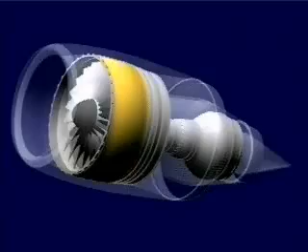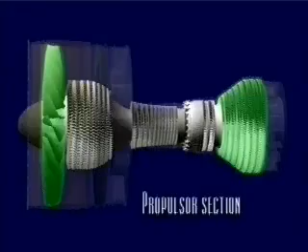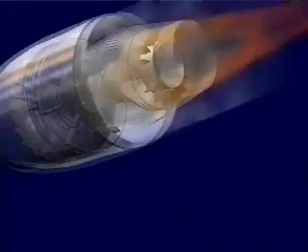The turbofan engine is a complex synchronization of several components working together as two parts: a core section that produces power to drive the propulsor section that produces thrust. Thrust is a force created by the acceleration of air, an application of Newton's second law of motion, commonly expressed as force equals mass times acceleration. It is this force that propels the aircraft.

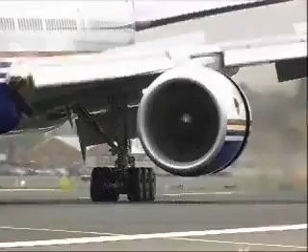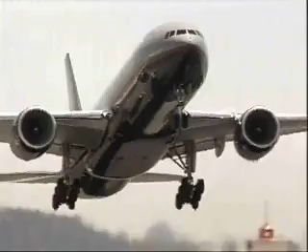To see how this thrust is developed, let's look at the internal workings of Pratt & Whitney's PW4000-112 turbofan engine. The first component is the huge 9-foot diameter fan that rotates 2,800 times a minute at takeoff. This giant fan sucks in enough air to vacuum out the air in a 4-bedroom house in less than half a second. As the air races through the massive fan, it's separated into two streams.

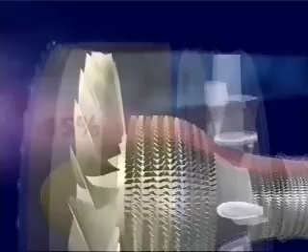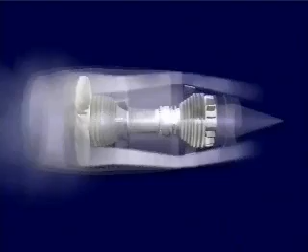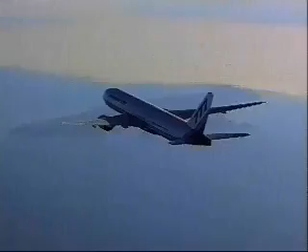Only 15% of the air flows into the interior core of the engine. The remaining 85% is ducted along the outside of the core and is forced through an ever-narrowing space, the fan duct, picking up speed along the way. The ratio of this air bypassing the core to the air passing through the core is called the bypass ratio. Because of its huge volume, the bypassed air only needs to accelerate a small amount in order to develop an enormous amount of thrust.

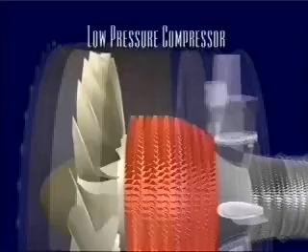Meanwhile, the other 15% of the air has entered the first component in the engine's core, the low-pressure compressor. Here, the air passes through several smaller stages, each consisting of a set of rotating blades in between a set of stationary blades. Each stage compresses the air, forcing its temperature and pressure to rise.

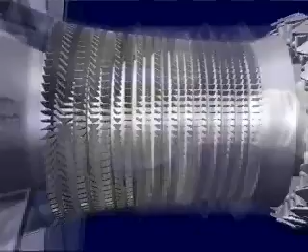After passing through the low-pressure compressor, the air enters the high-pressure compressor, which rotates faster and is responsible for 70% of the total pressure rise. After the air has passed through both compressors, it is 35 times higher in pressure and 1,000 degrees hotter than the outside air.

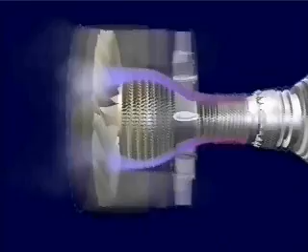The compressed air is now at the right pressure, but it is moving too fast to be efficiently ignited, so it enters a diffuser, where it slows down while remaining at the optimum temperature and pressure. The air then enters the combustor, where its energy level is greatly increased.

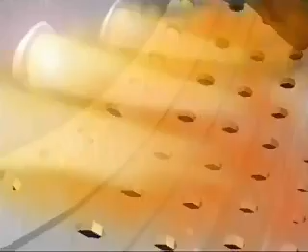This is accomplished by adding fuel through a series of injectors and igniting it, further increasing the temperature of the mixture by 1,600 degrees. The higher the pressure of the air, the more energy will be added during combustion, and the more efficient this process becomes. This is why the compressors were used to increase the air's pressure.

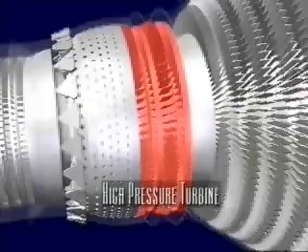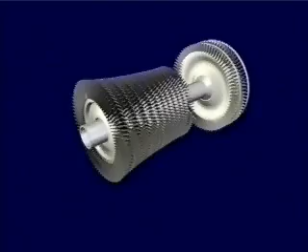Now, the superheated and compressed air mixture is ready for the next phase. Blasting through the high-pressure turbine, the high-energy air spins the blades at over 10,000 revolutions per minute. These blades are connected to a shaft that runs through the center of the engine and drives the high-pressure compressor. In fact, the only purpose of the high-pressure turbine is to extract enough energy from the air to turn the high-pressure compressor. Together, these components make up the high spool.

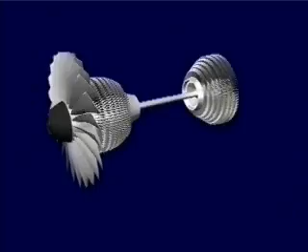Next, the air passes through the larger low-pressure turbine. This turbine has two purposes. First, it extracts enough energy from the air to power the low-pressure compressor at the front of the engine core. These two components are connected via a second shaft, which actually passes through the center of the high spool.

However, the second and more important job of the low-pressure turbine is to turn the large titanium fan blades up front. The fan is connected to the same shaft as the low-pressure compressor and low-pressure turbine. Together, these three components make up the low spool.

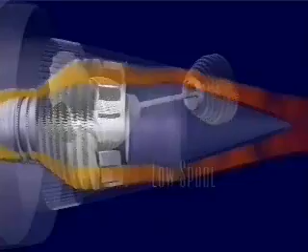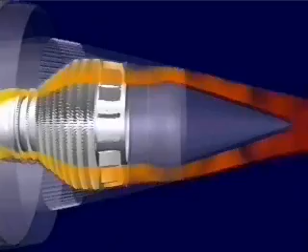Finally, the combusted air races out through the exhaust nozzle at the back of the engine to be accelerated one last time. The speed at which this gas exits the nozzle is called jet velocity. This exhaust stream produces only 20% of the engine's total thrust. The remaining 80% is produced by the large volume of accelerated bypass air exiting the fan duct.